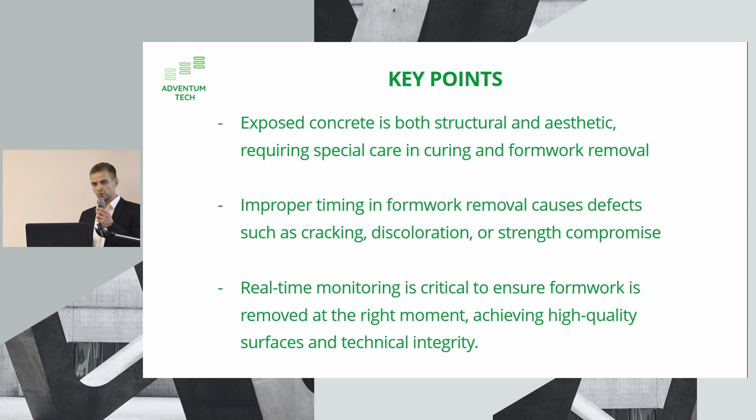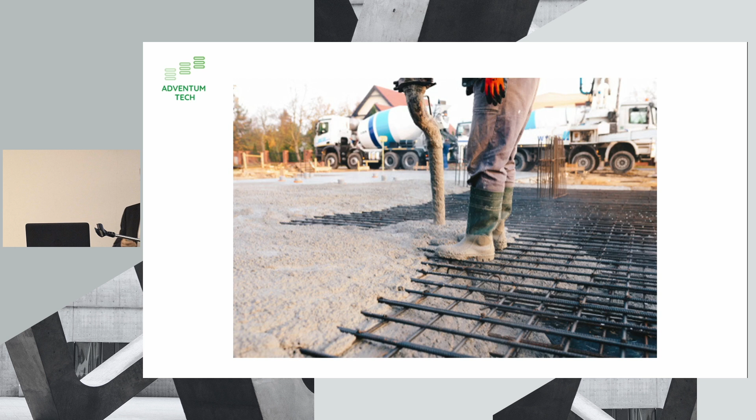So let's jump on the project. Whenever we deal with in situ cast projects, this is what we definitely understand, that this is how it's going to look. And my nightmare is to see deformations like this already during the construction or during the guarantee period, which usually is 5 years. This is definitely not something that I want to see.

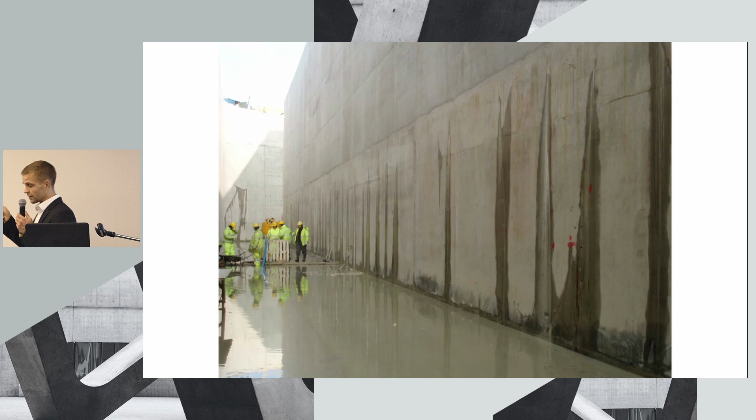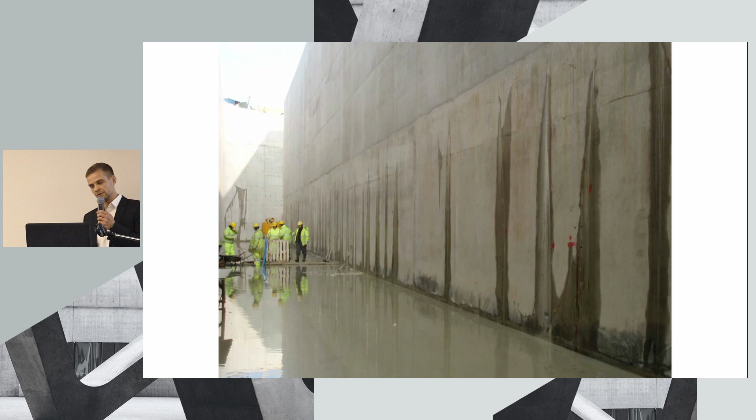Or during the construction works specifically, but we need to understand that there are some project specifics. If we work with tunneling, and I've primarily done tunneling for the past 5 years, the groundwater issues are always there, but whenever they arise, you always get extra questions and extra attention from the customer, from the customer's engineer. So those are definitely all the risks that I want to try to mitigate.

But when I dive into these risks and try to analyze them, and again, my goal will be to speed up the construction of the project, I have several factors that impact it. So first is the climate, surrounding environment conditions where the project is based, some moisture, and how I treat the concrete, whether that's hot summer and, from the water perspective, I treat it one way, or it's harsh winter and I have to think about some other things.

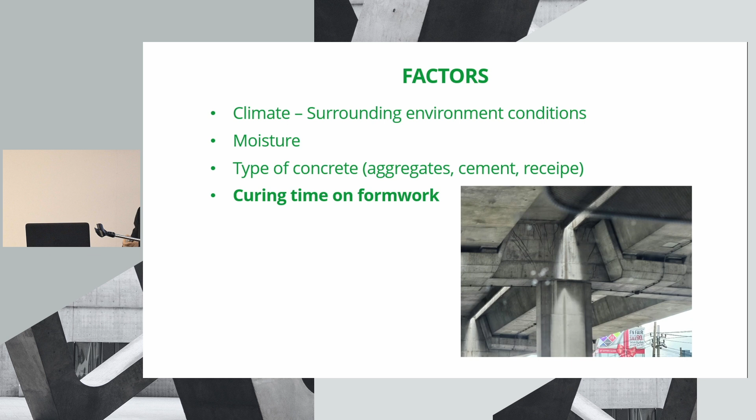I also have the choice of the type of concrete. I can go for higher grades, even higher than is prescribed in the project, or I can try to risk it and go with low grades, even though we know it's not possible. And also something that I always keep in mind, specifically in skyrise projects, is the curing time in the formwork. How can I speed up this process and at the end of the day deliver the project quicker?

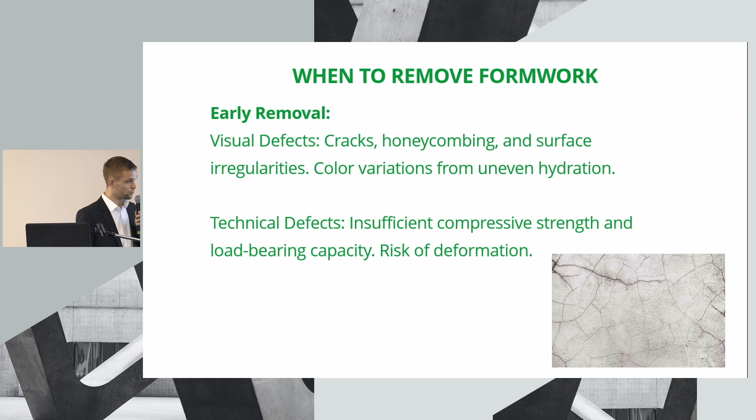When we talk about formwork removal, early removal can cause visual defects such as cracks, surface irregularities, and also some technical issues. And again, I can get a lot of trouble and a lot of extra focus that I definitely don't want to have in my project. However, late removal can again cause visual and technical defects that I don't want to have in my portfolio. I don't want to see them happening on my site, and that's something I also need to weigh in.

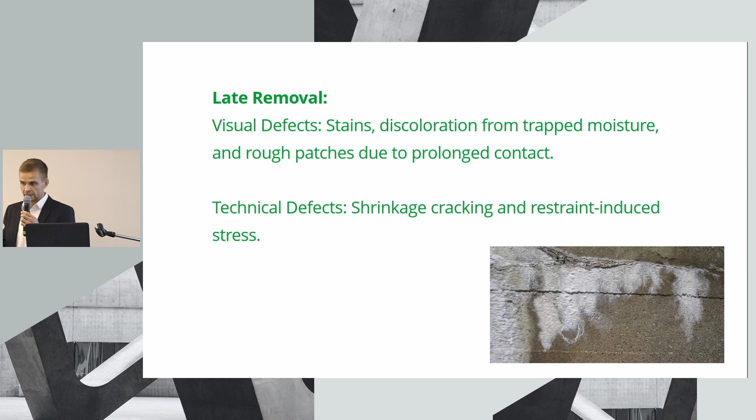Of course, I have some seasonal impacts. High temperatures can cause rapid drying, which can lead to concrete shrinkage and cracking, and at the same time, if we use monitoring systems, they can overestimate the strength of the concrete, not matching perfectly how it is in real life. So I need to be aware of all these things.

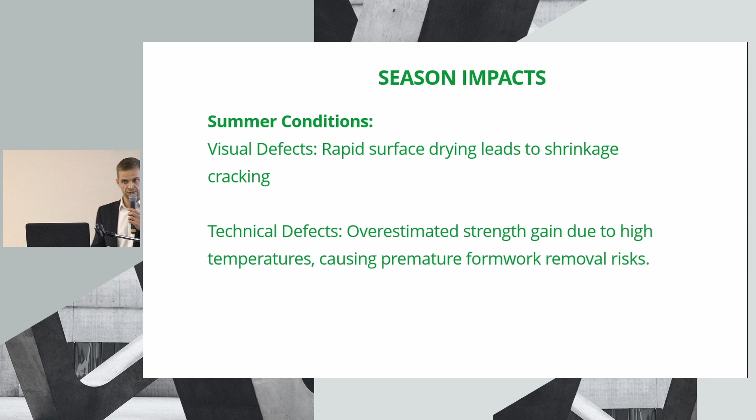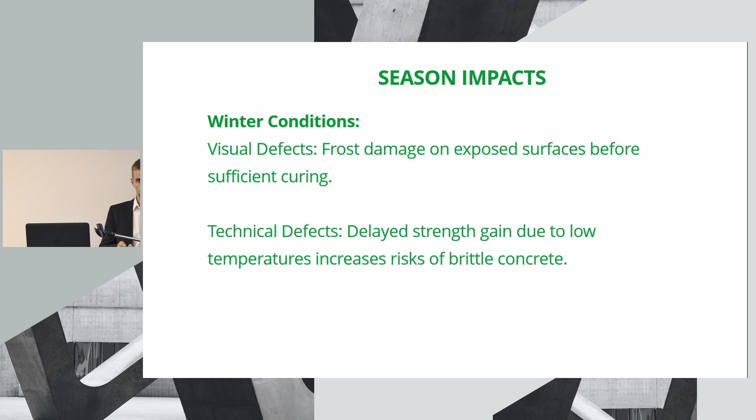And the same goes for winter conditions. Frost can really slow down the curing process, and there are some risks that I need to keep in mind when I do project management.

How do I hedge these risks? There are, of course, methodologies, methods, steps, guidelines. I can do constant testing and verify concrete compressive strength on site and in the labs. I can follow the guidelines by designers, formwork suppliers, concrete suppliers, and I can also incorporate real-time monitoring tools and try to control it to deliver the best value.

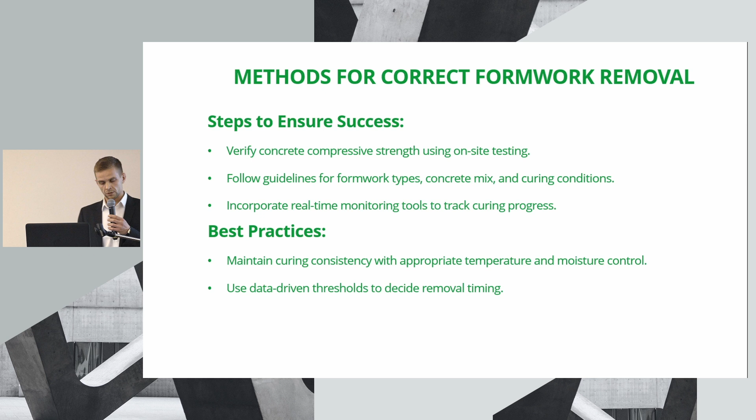So what do we actually monitor in the real-time world? We can monitor strength, we can monitor vibration, we can monitor hydration, temperatures. Some external factors, as I just mentioned, there's vibration, because if we cast fresh concrete and someone is exploding the rock right next to our site, these cracks and vibrations can cause visual and technical defects. And it also provides continuous data on what is happening on our poured, let's say, structure.

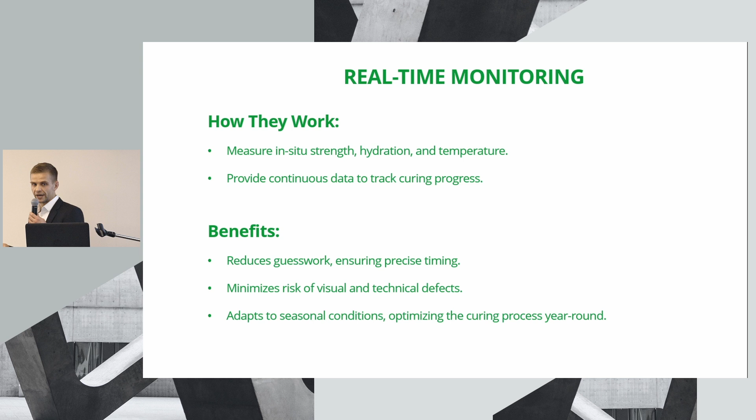The benefits: we reduce the guesswork. We try now to focus our decision-making and our argumentation only on real data. And this real data is representing very precise timing, so it can also work on some claim support. We minimize the risk of all these visual and technical defects, and we can really implement many things along the way.

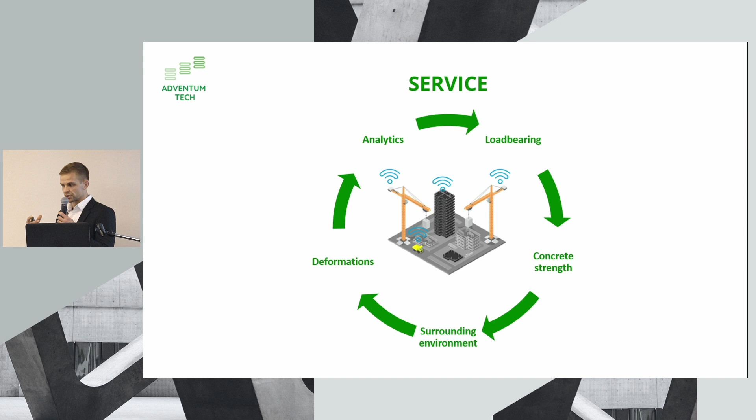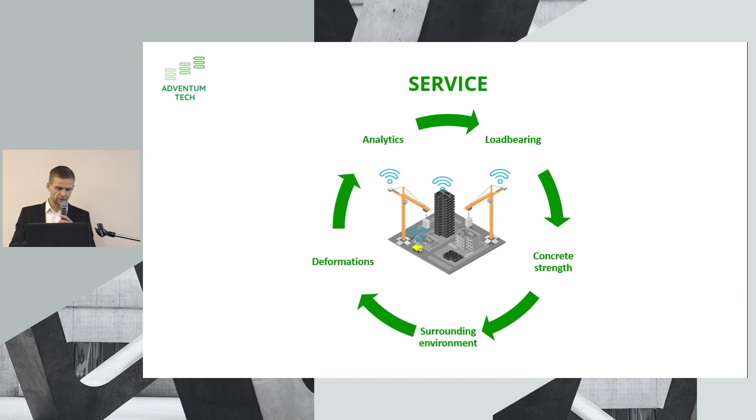So what we do in Adventum Tech, we've created a comprehensive solution for an in situ, let's say, project, where we can, additionally to concrete strength development and external conditions, monitor load bearing. We can monitor the impact of the surrounding environment, because again, groundwater management, for example, can cause ground to settle, that can cause the building to settle, and then again, it leads to other risks. We can control any type of deformation and combine it in one place for very deliberate analytics.

So we've produced a variety of monitoring systems that are being implemented on many projects across Europe. We have a full telemetric solution: the sensor, the base, and the software. Some examples: a load-bearing sensor that was first delivered in 2021, where we wanted to prove to the customer that he has some risk on his load-bearing along his project. Back then in 2021, one sensor would hold 3 tons per sensor as a working load. This year we're shipping sensors that will hold 1,000 tons each and will be used as a temporary bridge bearing. So we have some progression in development.

We have concrete strength detection sensors that, according to ASTM C1074, do their concrete development calculation. We have vibration impact sensors: if you equip your sites, you can record external vibrations impacting it that can cause cracks and deformation, and then you can further hedge this risk, hedge these claims that might come to you later.

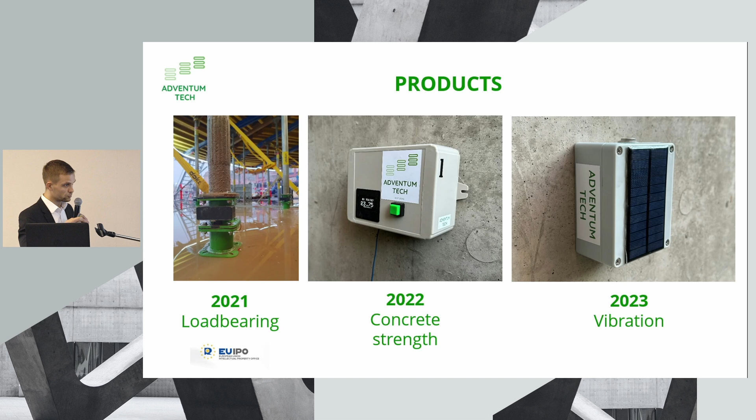And lately we've tested and implemented the slab control, one sensor with a variety of functions, including temperature, humidity control, vibration detection, specifically in the first 28 days when the concrete is developing. We can see the settlements of the structure. It can record any type of deformation, inclinations, concrete shrinkage over time. At the moment, this solution can hold a 20-year lifetime. It's cast in the structure, but we are very close to getting it now to 50.

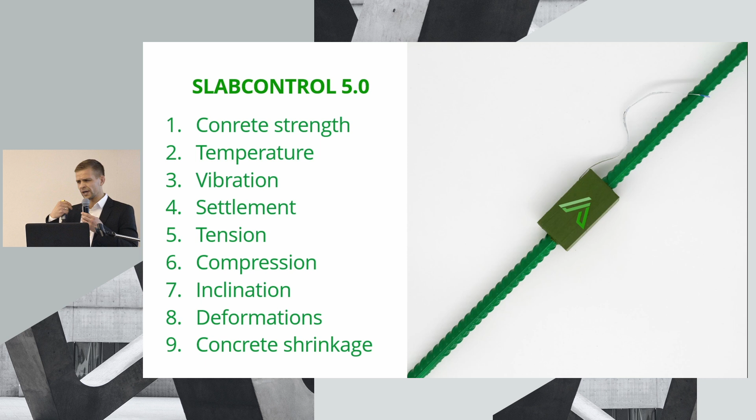So imagine you can cast in a sensor like this. It will live in the structure for 50 years, and you just hedge all your risks that are related to it. And if you are a real estate owner or bridge owner like Deutsche Bahn, for example, they are interested in this solution very much. You cast it in every newly built bridge and it is there forever. So additionally to all the construction-related risks, you can do improved predictive maintenance, you can get quick reaction time whenever any anomaly is spotted, and many other benefits.

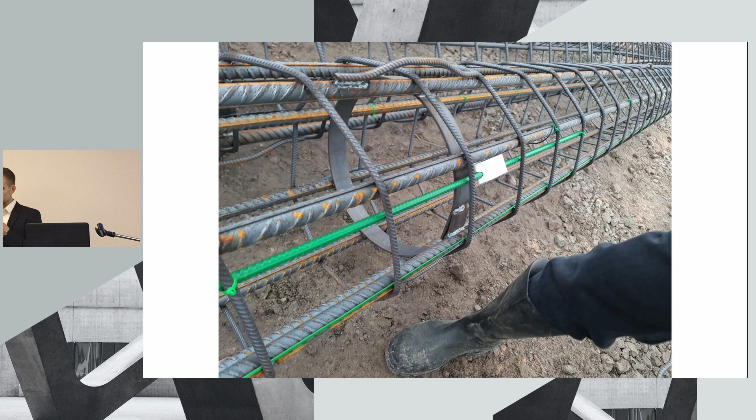We've additionally started testing these solutions in various special foundation projects because we want to implement them in quantities for tunneling projects. Tunneling shafts, according to my experience, are over-designed approximately 3 times, which is not okay for our sustainability goals. Therefore, we are on track to create a digital shaft solution for secant pile walls. Same thing goes for bridges.

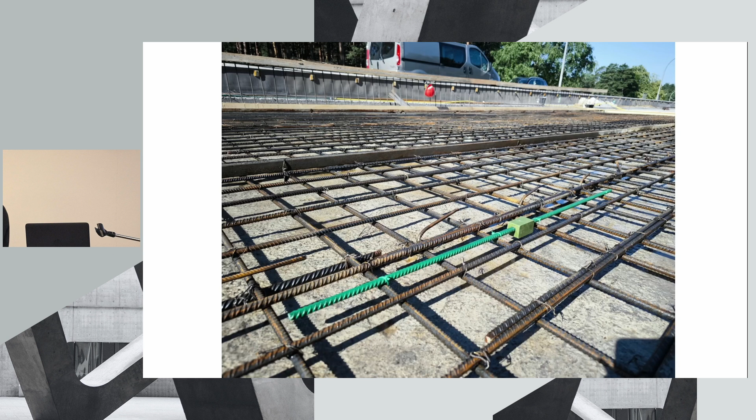We believe that specifically the in-situ cast bridge should be digital already by now, because it's not expensive. You can just deploy, let's say, on the span of a bridge, 100 slab controls like this, and you have enough highly qualitative data for the upcoming 50 years if you are a bridge holder or bridge authority, because with predictive maintenance and many other aspects, it just brings you benefits.

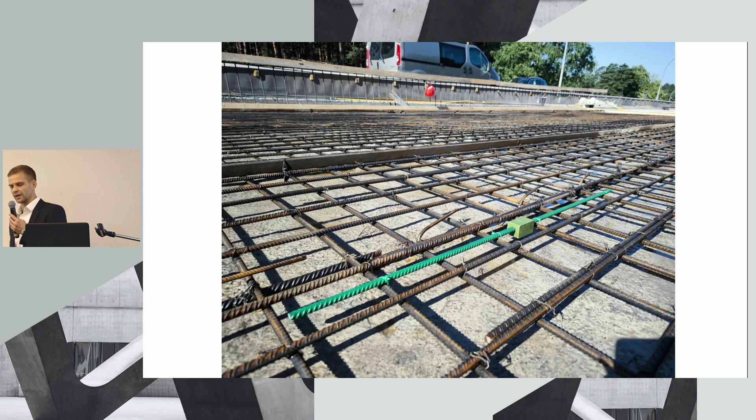So, yeah, we slid a little bit off the topic, but the timing of formwork is critical to achieve the desired visual and technical standards, specifically from a project management point of view, because of our risks and opportunities. If I can hedge my risks really well, it will definitely turn into financial benefits on my project cash flow. Early removal can lead to surface and structural defects. A real-time monitoring solution ensures optimal decisions, real data that can hedge all these risks and assumptions.

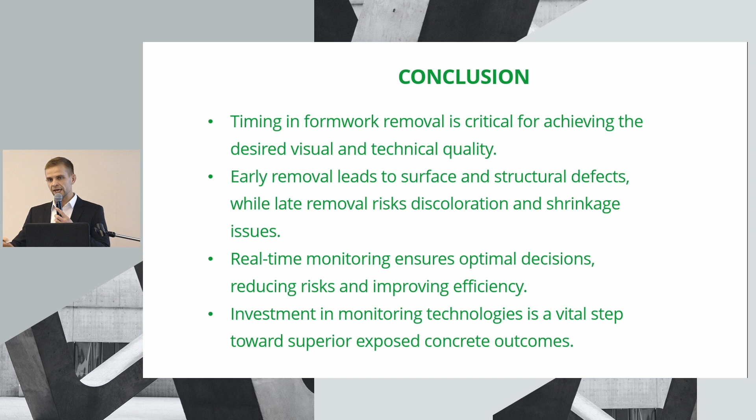And investment in monitoring technologies nowadays is very important for every company. This is my message that I want to spread to many of you. Don't be afraid to implement them in your projects. Don't be afraid to play with it, because only when companies come on board and try to use them in their daily decision making, this is the only way we can drive the change.